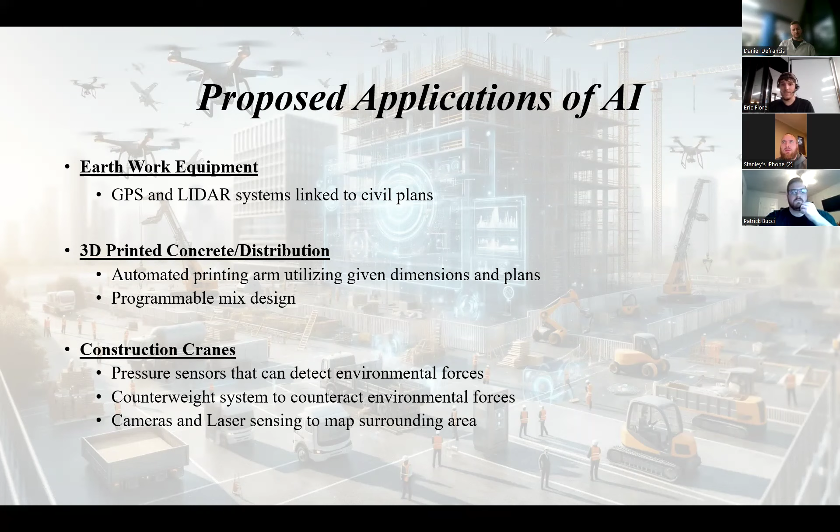So our proposed applications of AI are earthwork equipment, which will use GPS and LiDAR systems linked to civil plans, as well as 3D printed concrete and distribution, with an automated printing arm utilizing given dimensions and plans, and programmable mix design. And our last proposed application is construction cranes, where pressure sensors can detect environmental forces, a counterweight system to counteract environmental forces, and cameras and laser sensing map the surrounding area.

All right, so earthwork. Earthwork is an essential method that we use in the construction process. It involves moving soil and materials to create a desirable surface for the building and the site layout that we're looking for. However, it's one of the most intricate, hazardous, and labor-consuming tasks that we see on construction sites. Whether it's excavation, compacting, grading, dozing, this process is usually very physically demanding, and it commonly breeds mistakes on the construction site, as well as involves a lot of supervision and manual labor.

Gravis Robotics, that's a Swiss company, and they're leading the chase in autonomous excavation. They're developing an autonomous excavator that could make this idea actually become a real thing in the industry. Their autonomous excavator uses a combination of advanced technologies, a few of those being LiDAR, GPS, and GNSS. It allows it to scan a site. It can download and understand CAD files, as well as follow excavation plans with pristine accuracy.

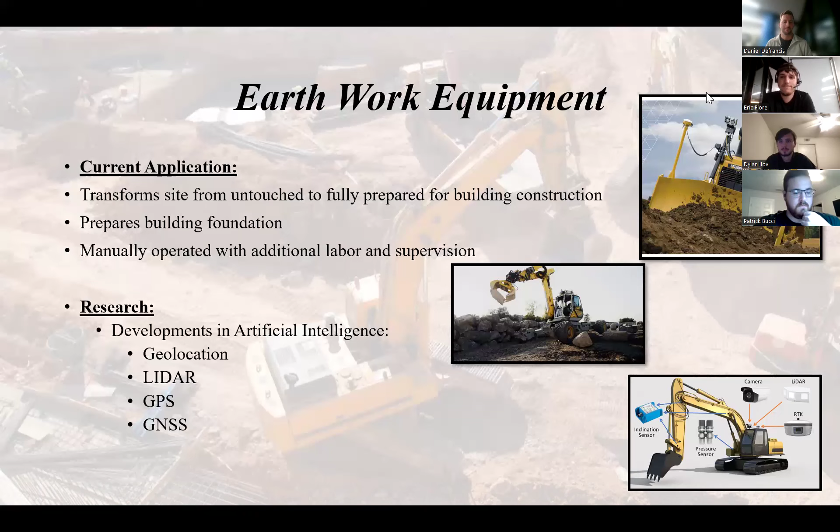Okay, AI is revolutionizing the concrete industry by optimizing both mix design and distribution, leading to cost savings, improved accuracy, and greater efficiency. Traditionally, concrete pouring involves large amounts of manpower and machinery, often leading to inaccuracy and high costs. But with the advent of concrete printers and distributors, companies can now print concrete components on site, drastically reducing construction costs and improving precision. One of the key innovations in this transformation is Concrete Copilot.

Concrete Copilot is an AI tool that was designed to optimize concrete mix design. Historically, designing the right mix for concrete involved trial and error, relying on standard formulas and months of experimentation to account for variables such as material availability, weather, and project specifications. Concrete Copilot changes this by analyzing vast amounts of historical data and project-specific requirements to create millions of possible mix designs. Within seconds, it selects the optimal mix, factoring in constraints like cost and material availability.

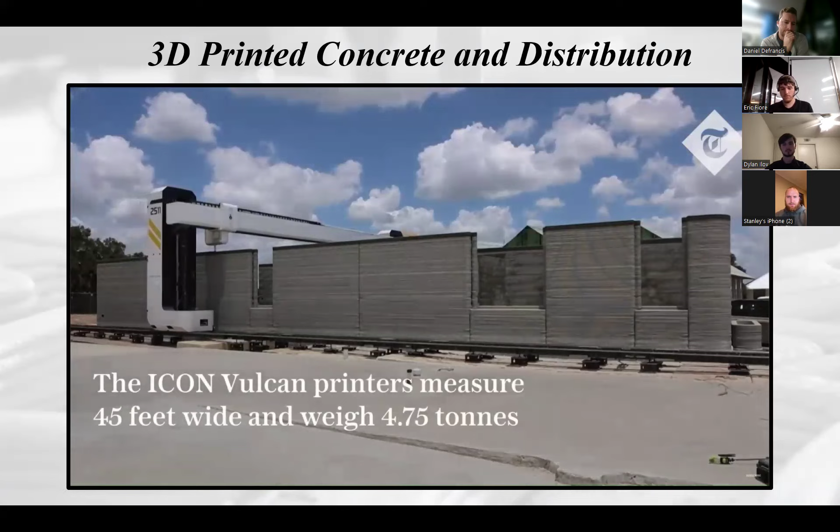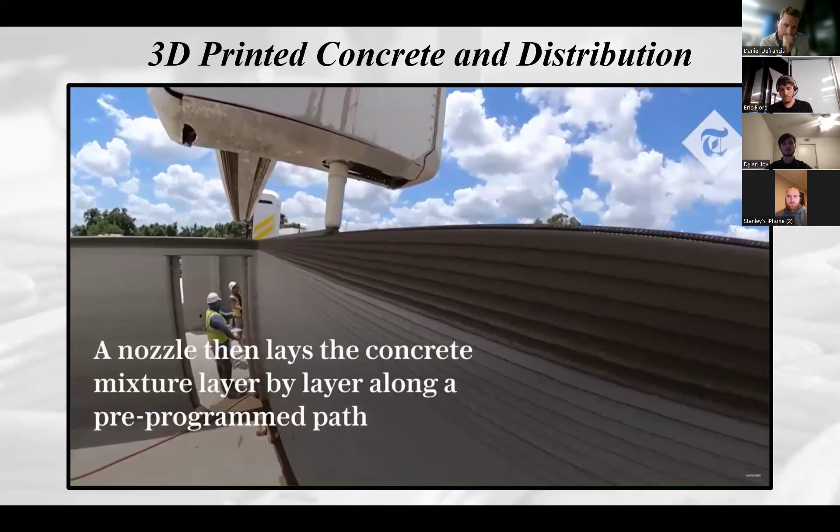One layer at a time, Vulcan prints a full house. It goes from the front of the slab to the back for one layer, and for these homes in particular, after 10 feet of printing in a few days, you have the wall system for a house.

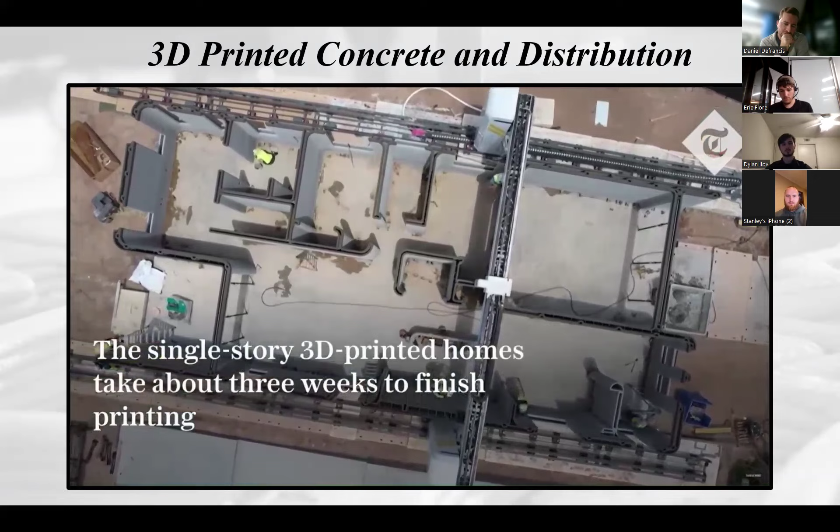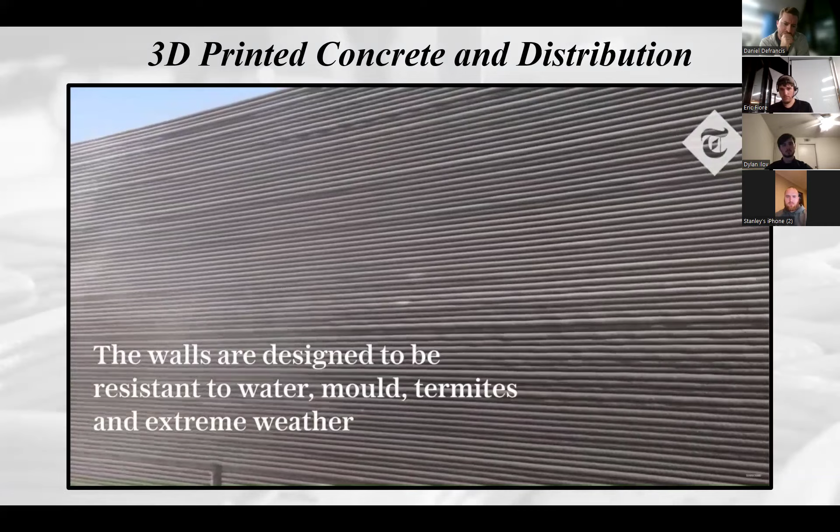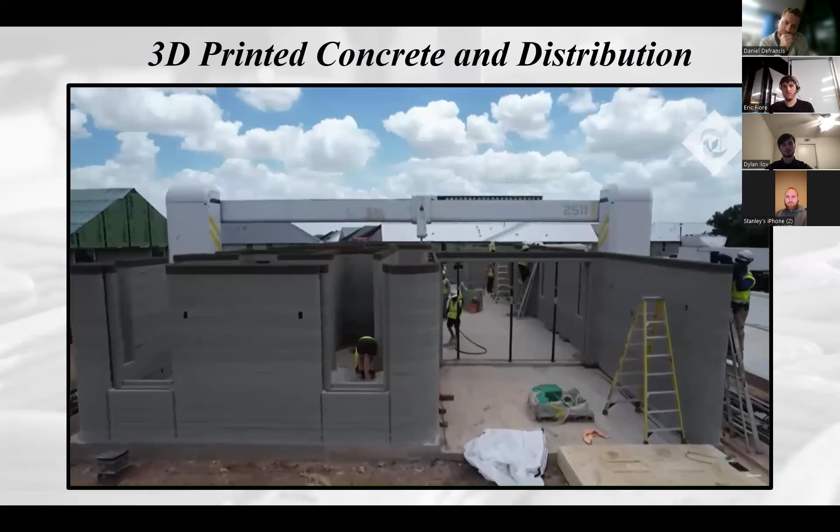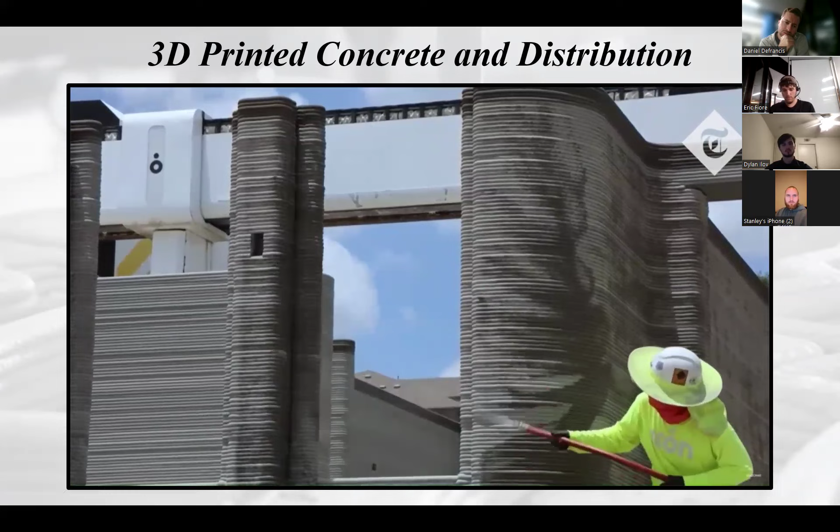What you're seeing in front of you are layers stacked on top of each other, kind of one at a time. The feedback that we're getting from homeowners is how exciting it is to have a different choice in the material. So our different layers provide this kind of corduroy effect, which can actually be really soft and be a great experience for homeowners.

Now to talk about cranes. Currently, cranes are operated manually with an operator in the cabin. This presents a couple issues, including counterweight management, wind interference, and proximity challenges. Additionally, the high labor costs associated with crane operations are a significant burden.

Despite these challenges, cranes are indispensable in the construction industry, as they are responsible for lifting and transporting heavy loads such as steel beams, concrete, and prefabricated elements. Moving these materials is crucial, but also poses risk, making safety a top priority. To mitigate these risks, construction companies and developers are increasingly integrating AI into crane operations. This involves the use of cameras, laser sensors, and pressure plates to enhance safety and potentially enable full autonomy.

360 cameras are a significant innovation that is ongoing and in developing use. These cameras provide a comprehensive view of the crane surroundings, allowing for the AI system to monitor and assess the environment in real time. The panoramic visibility ensures that operators can make informed decisions, avoid collisions, and enhance the overall safety of the job. Along with the 360 cameras, photo laser sensors will also be used in assistance.

Photo laser sensors play a crucial role in precise distance measurement. These sensors emit laser beams to detect obstacles and measure distances with high accuracy. This information is processed by the AI system to ensure that the crane operates within safe parameters, preventing accidents caused by close proximity to other objects or structures.

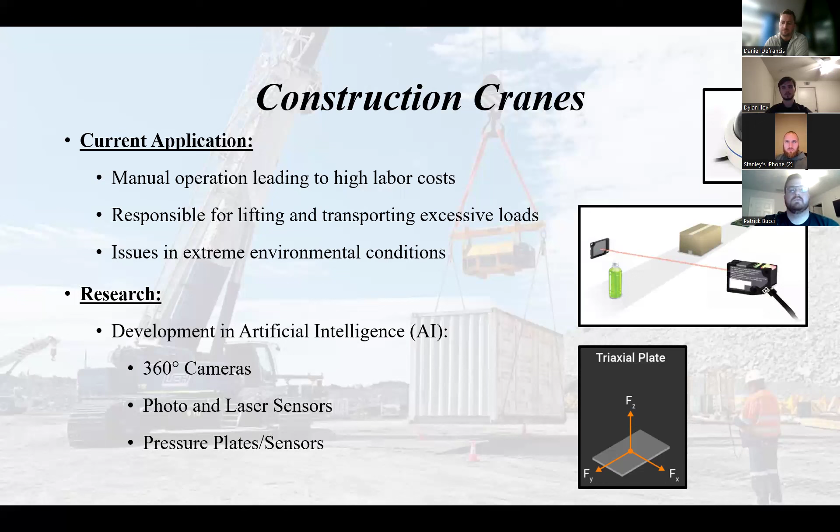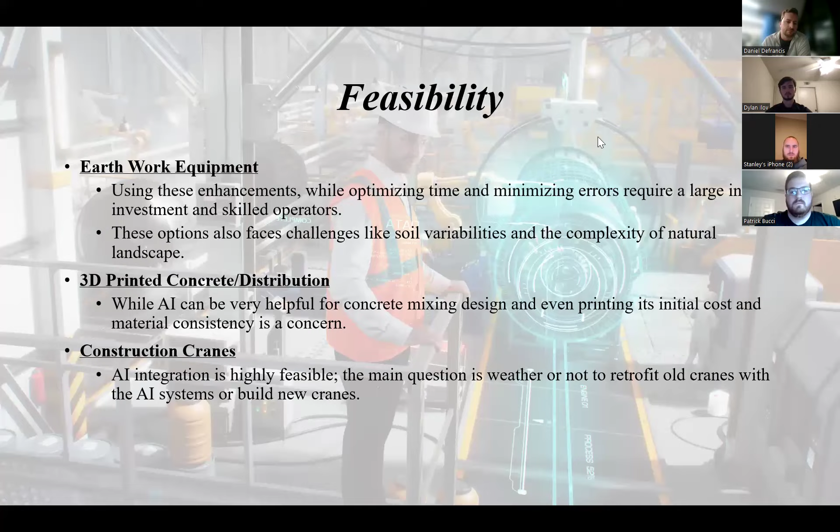In conclusion, the integration of AI technology and on-site construction methods represents a groundbreaking evolution in the industry, addressing challenges like labor shortages, safety concerns, and efficiency bottlenecks. The advancements in earthwork equipment, automated concrete distribution, and construction cranes demonstrate the potential of AI.

While these innovations significantly improve precision, speed, and worker safety, their implementation requires strategic planning to overcome limitations like high initial costs, reliability, and the learning curve associated with human-machine interaction. By bridging these gaps, AI has potential for revolutionizing construction processes, paving the way for a more sustainable, efficient, and innovative future.